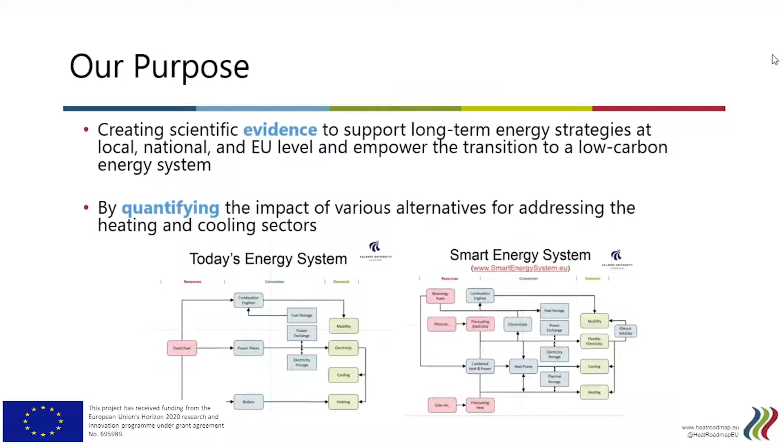In terms of the concrete outputs, we're developing these heat roadmaps for transitions. And the way that we're able to do that in such a holistic way is because we have all these different people involved. So we can consider the local nature of the heating and the cooling. If you attended some of the previous webinars, we've done a lot of very fine-grained mapping in terms of how we spatially distribute demands and how we spatially distribute supplies in what we call PETA, the Pan-European Thermal Atlas.

And as I said, we have this idea that what we do in the heating and cooling sector should contribute towards the decarbonization of energy in general. So we put a lot of effort into considering the wider energy sector. How do we interact with the power market? How do we interact with the transport market? And how do we interact with the built environment? And there'll be another webinar coming up soon, I believe, specifically about the energy savings in the built environment.

And using all these elements, we want to create these roadmaps so that they are technically possible. We don't want to rely on technologies which aren't really currently in existence. I mean, it would be very easy to make a roadmap where we say that we rely on carbon capture storage, and from there on, it's very easy to decarbonize anything. But we want to use technologies which we have a high level of trust in today. And we'll talk about that a little bit later on when we say what is possible to develop in the industrial sector specifically.

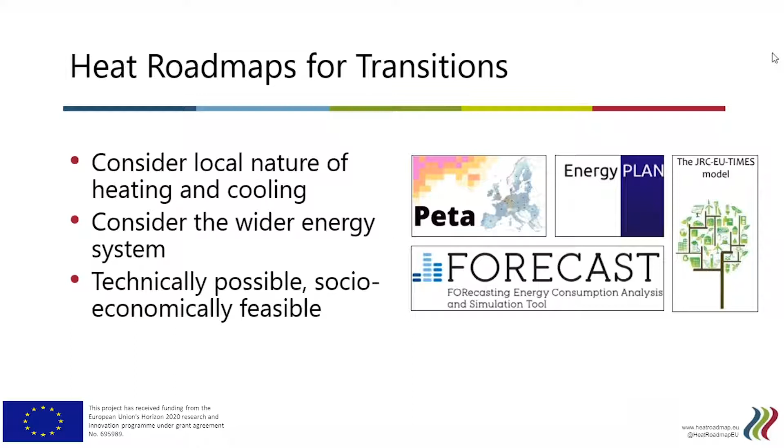In terms of the methodology, this is a bit of a complicated slide, but I think that Bas is going to explain some of the things, specifically how the forecast model is used and how we move that into the energy models later on. But I think it primarily serves to emphasize that part of the reason that we have such a large consortium and that we do a lot of this work is because we use a lot of very granular detail. As I said, both in terms of the built environment and in terms of the spatial distribution of the demands and the supplies, and through that also what is the potential for heating infrastructures like district heating, like gas networks, and the energy system. So we put a lot of this effort together.

And then we build reference scenarios and alternatives with the aim of being able to really support and quantify this evidence towards these heat roadmaps. And in that whole ecosystem of the knowledge and the tools that we're developing, industry has played an important role, because so far industry has been something which is very, very easy to neglect. I mean, we all know about buildings, so we work with buildings. But one of the really novel aspects of this project and of the way that we've been approaching making these holistic energy strategies is that we've been able to include industry, and to really have a nuanced view of how it happens.

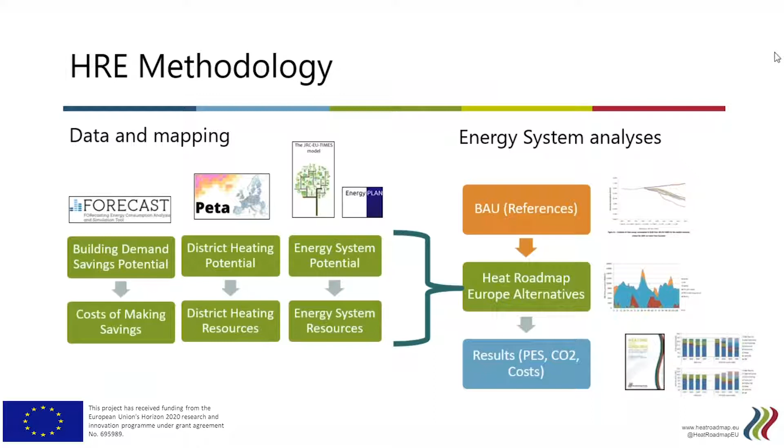My name is Bas van Zuijlen. I work at Utrecht University at the Copernicus Institute for Sustainable Development, and my specific focus is on energy efficiency. And of course, the most sustainable form of energy is energy that you do not use. So for this project, we are focusing on saving heating and cooling demand for industry.

So the outline for the webinar today is, first I'll talk a bit more about the broader Heat Roadmap framework and how these cooling and heating cost curves fit into this framework. I will discuss the methodology that we used, both the more general approach, because we also developed cost curves for the built environment. So we aligned our method with the cost curves for the built environment.

But of course, focusing more on industry, we have some small tweaks that really fit with how heat is saved in industry. I will also discuss a little bit the baseline heat demand in industry, because the cost curves are very much linked to this baseline. Then I will discuss the results that we found, both in terms of costs and also in the energy savings potential in industry. And finally, I will have some conclusions based on these results. And if you have some questions, please submit them, and we can discuss them after the conclusions.

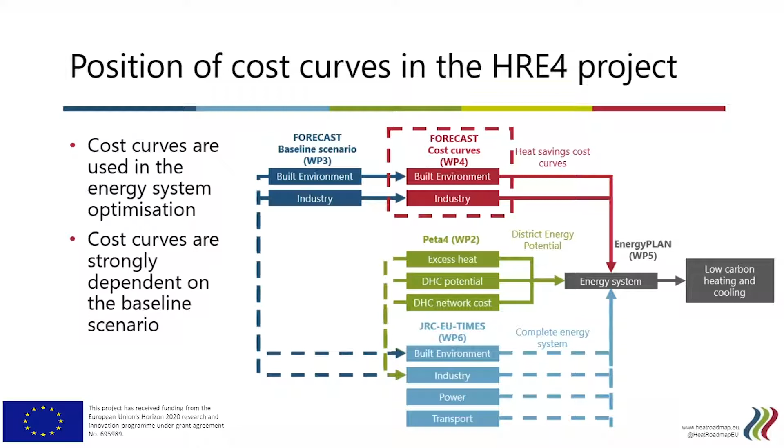In order to address this question of the broader whole energy system decarbonization, we also have a look at the bottom part in light blue, based on the EU TIMES model from the Joint Research Centre, who do a complete energy system simulation. And we use these inputs also for our final optimization in gray on the right side, where Aalborg University will optimize the whole energy system, but with a specific focus on the heat savings cost curves, which we'll be discussing in this webinar.

So the heating and cooling cost curves were developed by TEP Energy from Switzerland, Fraunhofer ISI from Germany, and Utrecht University, where I work. These partners were the same partners that were also developing the baseline heat demands. So therefore, we really knew the data that we were working with, which made it, I think, easier to also come up with these cooling and heating cost curves.

Before we dive into the specific methodology, it's very important to realize that we are talking about delivered heat and delivered cooling, which is something different than final energy. In this graph, you have an overview of the difference. Final energy is the energy that is delivered to the end user. So if your home is heated by natural gas, the natural gas delivered to your door is the final energy. However, you still have to convert this gas into heat. Once the gas is turned into heat by a boiler, or possibly comes from some sort of storage, that is the delivered energy. That's the focus of this project.

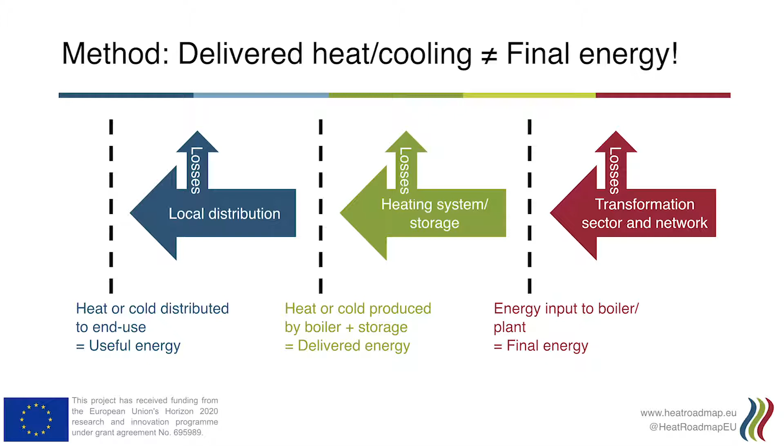And note here that the delivered energy and final energy for district heating are actually the same, because there's no conversion done by the end user. And finally, you also might have some losses in the local distribution of heat. If you also subtract those losses, then you come to useful energy. So delivered energy, which we focus on here, is different from final energy, but it's also not the same as useful energy.

So today we'll only be talking about industry, but in an upcoming webinar also the cooling and heating cost curves for residential and tertiary will be discussed. We also developed these cost curves for the 14 Heat Roadmap Europe member states, but also for these member states individually. It should be noted here that this cost curve is something different from a marginal abatement cost curve.

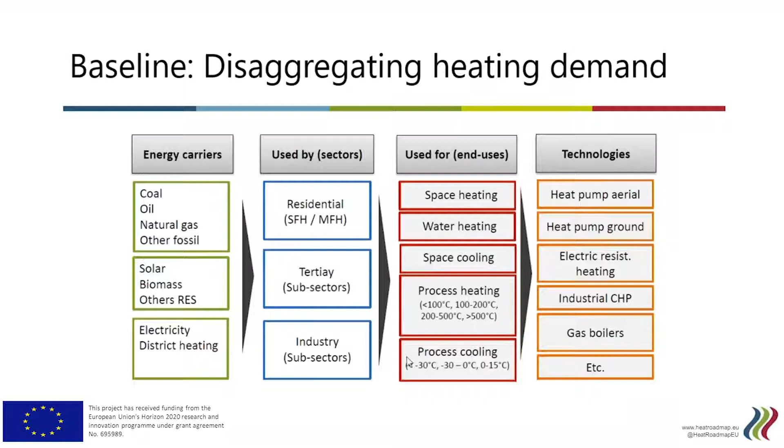So this is of course very important. How is the baseline made up? The baseline is based on the EU reference scenario 2016, or at least the activity data in industry is aligned with this scenario. So we assume the same amounts of activity. The CO2 price increases from 2015 of about, well, what are we at the moment? A few euros per ton, up to 90 euros per ton in 2050, also based on the same EU reference scenario. Additionally, we assumed that current policies will remain in place and no other policies will be applied.

So you can think about the EU Eco-Design Directive. We also tried to include some local support schemes, but because these differ per country, it's really hard to completely include all of them. But the stronger these local support schemes were per country, we modeled this per country to also show more ambitious heat savings.

Finally, we also performed a very extensive literature review to look at what are industrial technologies where we can save heat, how expensive are these technologies, how much heat can they save, and we updated the forecast model with these technologies. It's very important to realize that this baseline scenario, although it comes out of the forecast model, it is not a forecast. This baseline scenario could be viewed as a current policy scenario. So what happens if we leave all the current policy in place and, well, then let the markets decide what happens.

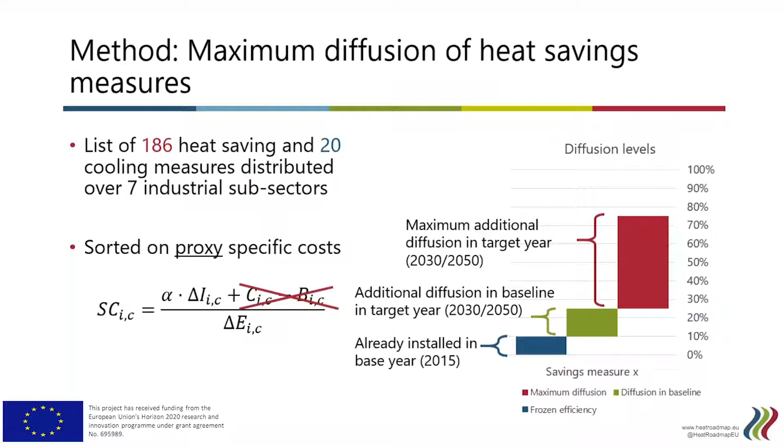However, in our case, because of the general method, we are focusing solely on the investment. We're not taking into account the savings on the energy bill because that will be done in the full energy system optimization done by EnergyPLAN, as I showed in the first slides. So the annual costs and the annual benefits will not be taken into account. So then, of this list of energy savings measures, we can basically divide them up into 5 different types of measures. So the first type is a basic measure. So these measures have already been implemented in the baseline to some extent. So if you remember the graph from a few slides back, maybe up to 25% of this potential has already been implemented.

Of course, we can increase the diffusion of these energy savings measures up to maybe 80, 90, or even 100%. Then there are more innovative heating measures. So these measures have not really been implemented in the baseline scenario yet. So there, you can imagine that there is much more potential for these measures. Then, as a third part, we have structure-based heat saving measures. So these measures are not really a technical add-on which you can invest in, but it's more like changing the structure of your industrial setup. So examples are shifting away from blast furnace steel generation to electric arc furnace, or increasing the recycling rates for paper or glass, so you have to produce less primary glass and paper and can reuse more.

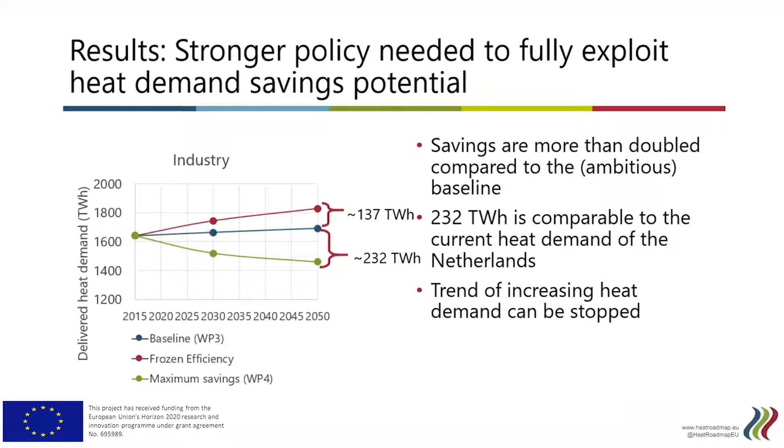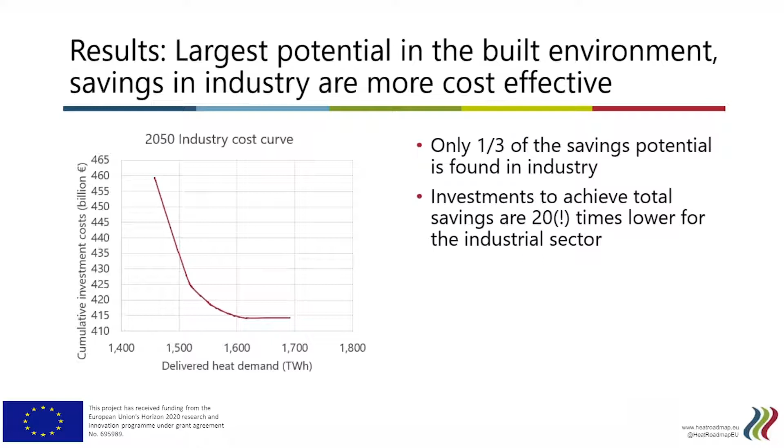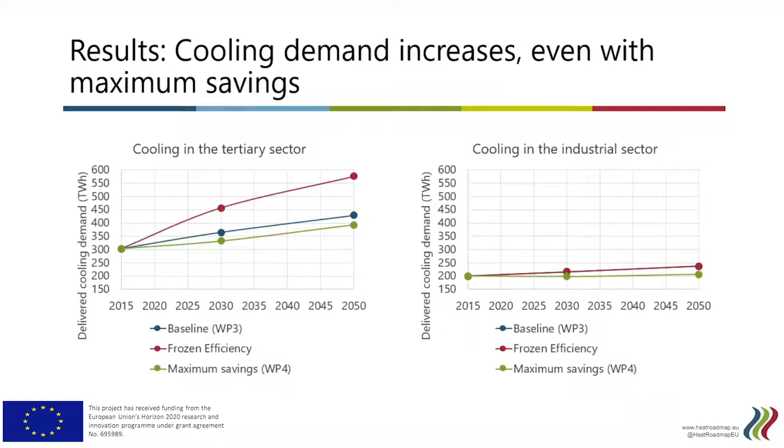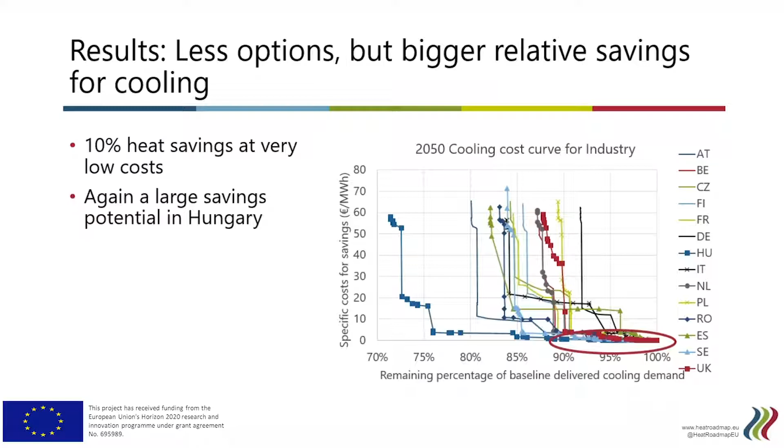So again, a similar graph as I showed before for the heating cost curves, but now for cooling. Again, you can see that Hungary has quite a large potential for savings at relatively low costs, while Germany and the Netherlands can only achieve relatively less savings and have to switch to higher cost measures more quickly. The total amount of savings, however, is on a percentage basis much bigger for cooling compared to heating.

So then to the discussion, and I'll mainly focus this on the position of the cost curves within the heat roadmap. Because we focus on delivered heating and cooling, this is not really what most experts use. Usually these savings are reported in final energy demand. So therefore, these values in euro per megawatt hour saved might not be easily recognized. And also, we do not include savings on the energy bill in our cost calculations. So therefore these figures might seem too high to other experts in the field, although of course it mainly has to do with a difference in methodology.

The cost curves also do not include demand-side supply technologies. So for example, investing in a more efficient boiler is not included in these cost curves. It will be included in the final optimization, however, not in this part of the heat roadmap project.

Also, and this is especially relevant for industry, quite some of the saving measures that we looked into mainly save electricity and also save a little bit of delivered heating or cooling. So you can imagine that when we calculate the proxy-specific costs, these measures might seem much more expensive because we only focus on the delivered heating or cooling savings. Actually, someone working in this industrial sector will look at the total picture and also save electricity. Therefore, the total savings might be cheaper than we show them in our cost curves.

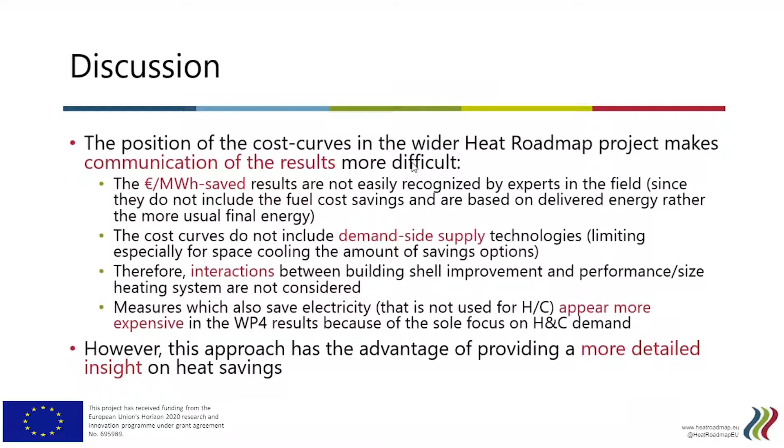So then the conclusion of these cost curves: we can achieve really a considerable amount of heat savings and also some cooling savings on top of the current policy scenario. So there's quite some potential there. In general, we see that the heat savings in industry require less investments than in buildings. But as I mentioned before, the total potential for industry remains rather limited.

So it's interesting maybe to look into new technologies or processes that should be developed if we really require that we achieve further heat savings in order to get beyond this 82% that I showed. Also, the low-hanging fruits here I showed are the heat savings based on the structure-based measures, where we combine both the resource recycling with heat savings. So then we also save the energy that's embodied in this resource as well.

So for further policy development, we see that there is this large savings potential. However, it remains untapped in the current policy scenario. So if we want to achieve further heat savings, we really need to start thinking about maybe a higher CO2 price or other measures which bring industry to do further investments into heat savings. Also, currently a hot topic, I think, circular economy in policy making also helps to reduce heat demand. So therefore, it's interesting to look also into this synergy.